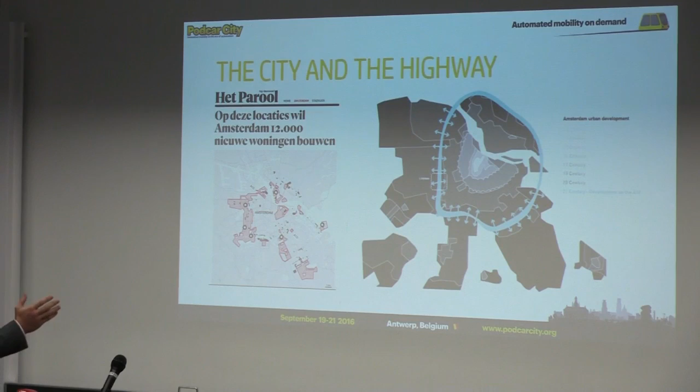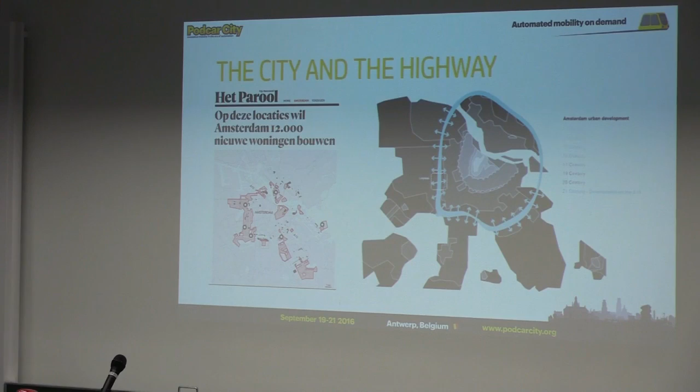Well, if we have a look at the city and the highway, we see that Amsterdam has been increasing its boundaries over the last centuries because of the growing population. And Amsterdam recently announced that there's another need for more housing, but they want to accommodate the housing within the current city boundaries. So there's a need for condensing housing within the current boundaries. And you see the ring road indicated in blue. And here we see Lelylaan, which we'll be discussing in a few moments.

When we look at the highway, we see a few interesting things. There are lots of parking locations next to the highway. But to get there, you need to get off the highway into the urban area and enter the parking location. So this brings you extra traffic within the urban area, which does not need to be there.

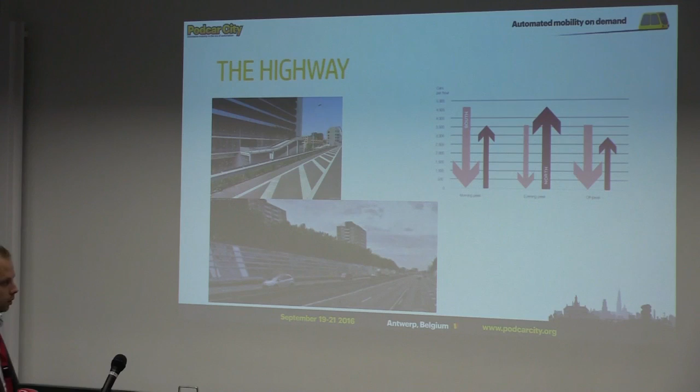If we have a look at the transformation of the A10, recently in the Netherlands, lots of investments have been made in their ring road. So the road authority said, we are not going to do anything about the A10 highway. We are not going to reduce the space allocated for it. We are not going to increase it. The investment is made, and that's everything you have to do with it.

So we recently looked at the innovation of the car technology, adaptive cruise control, dynamic lane use, and we estimated that by the use of adaptive cruise control, there exists some space on the ring road, as vehicles can drive much closer to each other, that you can accommodate some of the traffic which is currently in the city center. So thereby you reduce the traffic load in the city center and accommodate it on the A10 highway.

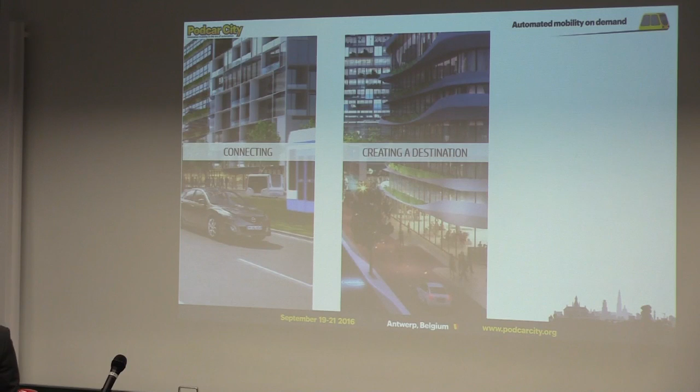And what to do with the free inner city space? Well, we used three things. Connecting, so back to the Lelylaan. It's a boundary right now, so we need to connect both parts of the city. And as we saw in the picture, it's not an attractive destination. So make it a destination. Make it a location where people want to be.

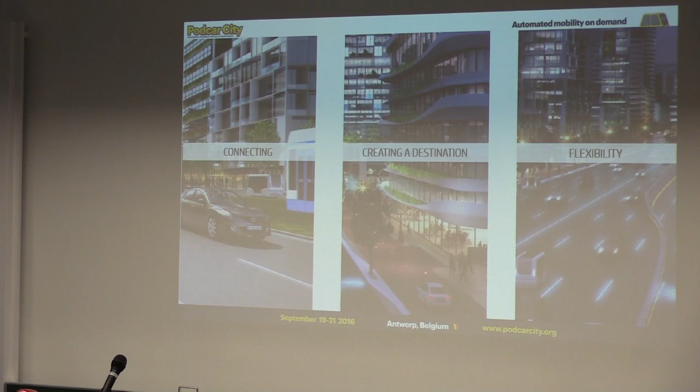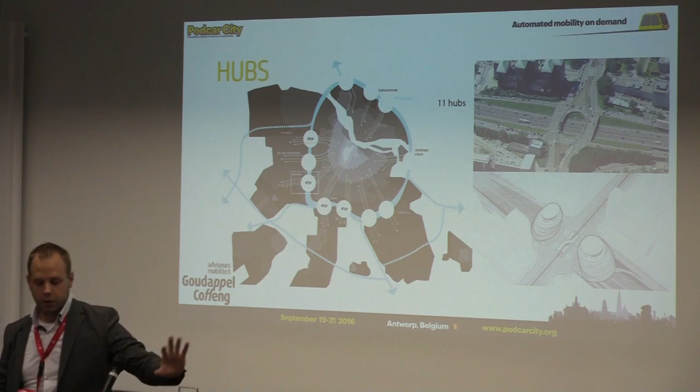And make the A10 highway a flexible one to accommodate directional demand patterns, making lanes flexible such that you can accommodate directional demands. And if we have a look at the Lelylaan specifically, which is indicated here, there are many more locations in Amsterdam for which the same principle holds. These are all indicated with the circles on the ring road.

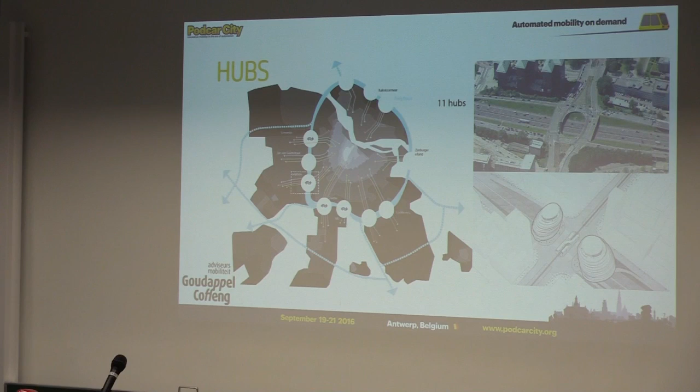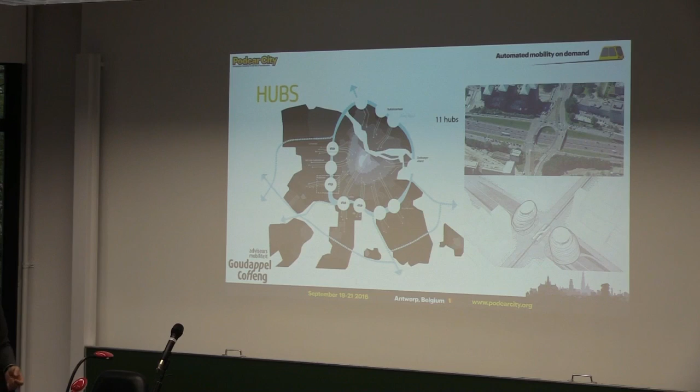On the top level you see the current situation on the Lelylaan. And currently it's not possible for cyclists, for pedestrians to cross the A10 highway. So it's really a huge barrier to get from one side to the other side. So what we proposed is make it a hub. Make it a hub where people can park their car and get into the city center directly from the highway.

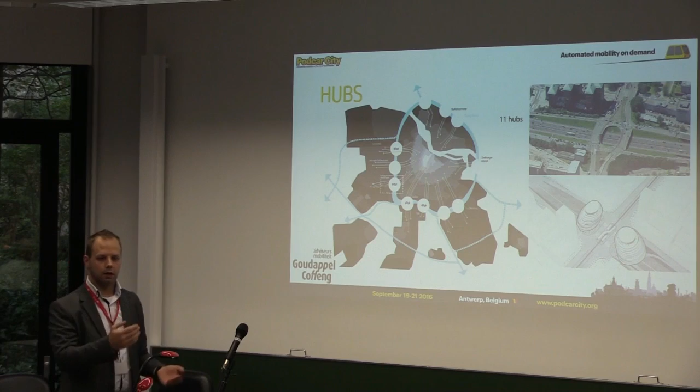So these are the towers, the parking towers, which you can drive directly from the highway into the tower, park your car and transfer to another mode and get in the city center.

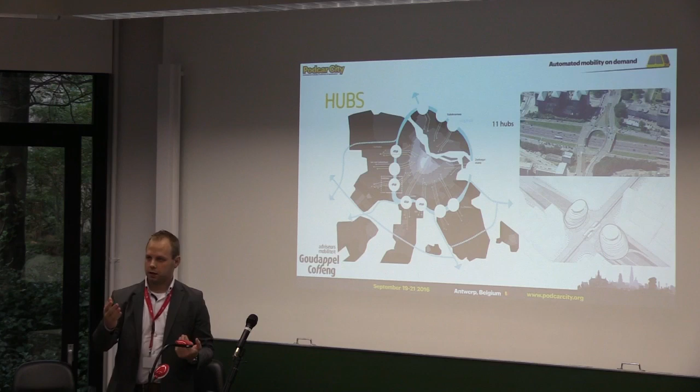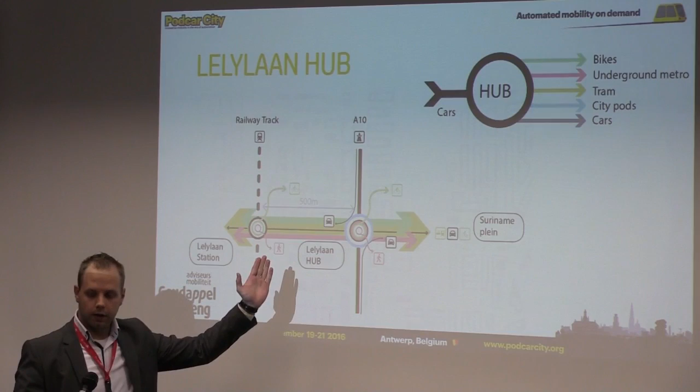That's also explained by this graph. So drive into the hub, transfer to another mode, make it attractive to use these modes by allowing longer parking times and reduced rates. There's a lot to gain on that.

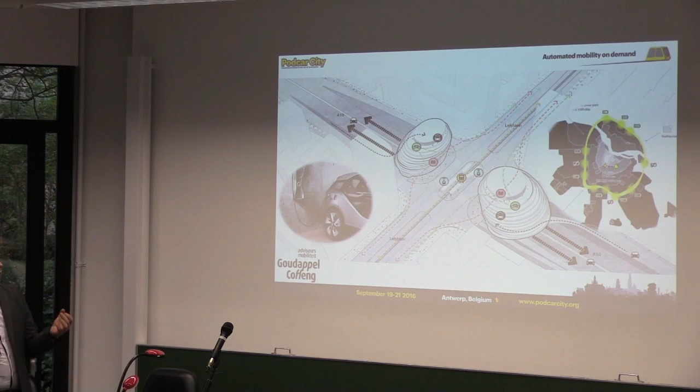And there's another benefit. Given the recent developments in electric cars, it's likely that in a few years more cars will be electric, and you can use these hubs as a power reserve for inner city energy use.

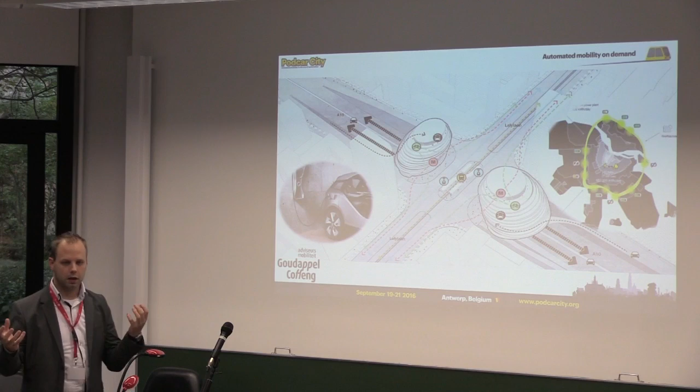Well, as we are at the Podcar conference, we also thought about one of the mobility solutions to get from the hub into the city. Why not use Podcars? These Podcars can also contribute to the functioning of the current public transport system in Amsterdam, since recent studies there indicated that public transport, especially in this section of the city, is really slow.

So why not skip a few stops that aren't used much, and make sure these pods stop there, collect multiple passengers, drive to a transfer stop, and let them interchange there. This way you can increase the speed of public transport while still providing a high level of service.

We've also been doing, at Goudappel, some other projects in the Netherlands on automated vehicles. It's a completely new subject, so we're exploring the field on all different kinds of subjects together with some partners, including TU Delft. Could you use automated vehicles as a last mile solution?